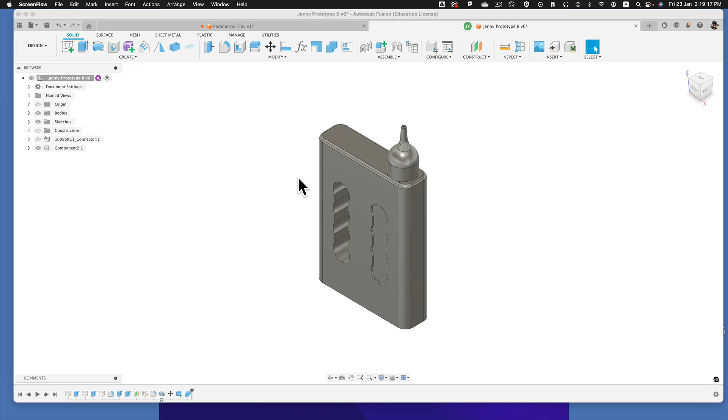Okay, in this video we're going to look at how to print two materials on the 3D printer. Specifically, when we look at this model on the screen here, it's a prototype of a drinking bottle, and the handle area here would definitely benefit from some soft material, touch points for the user.

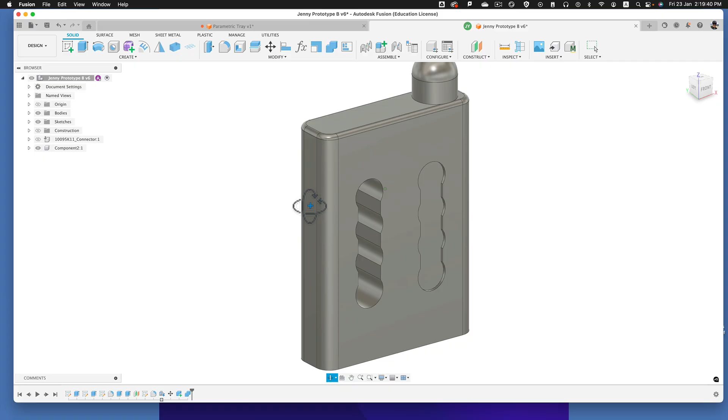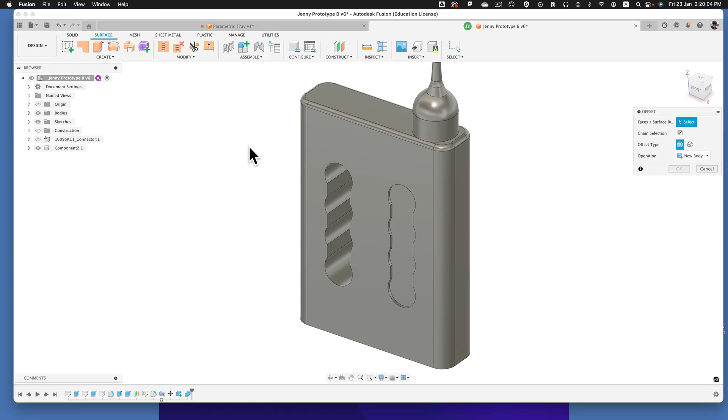At the moment it's just all the same material, and so we're going to add some material in here to help the user use it more comfortably. So let's get into it. I'm going to use the surface environment, and from the create menu I'm going to create an offset of that surface. So you can see the offset menu appears.

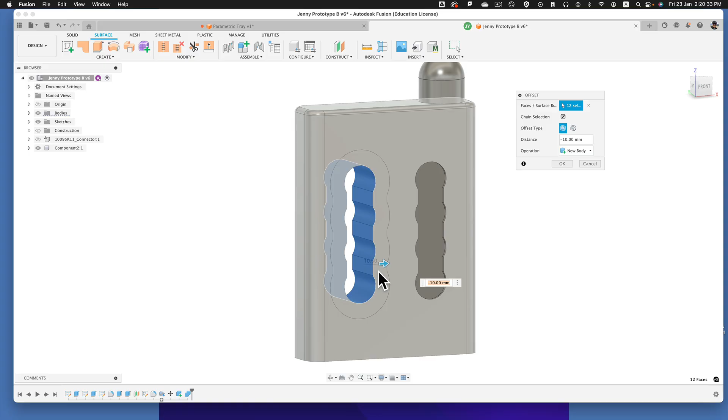I'm going to go inside here and just make sure that all of these surfaces on the inside here, these are the surfaces I want to offset and create a separate body from and print from a different material. So I'm going to maintain the dimensions that have been made here, and I'm going to make the offset out of the body. Now you can see it's defaulted to 10. It's probably a bit much, so I'll use 3 as my offset, and I'm creating a new body there.

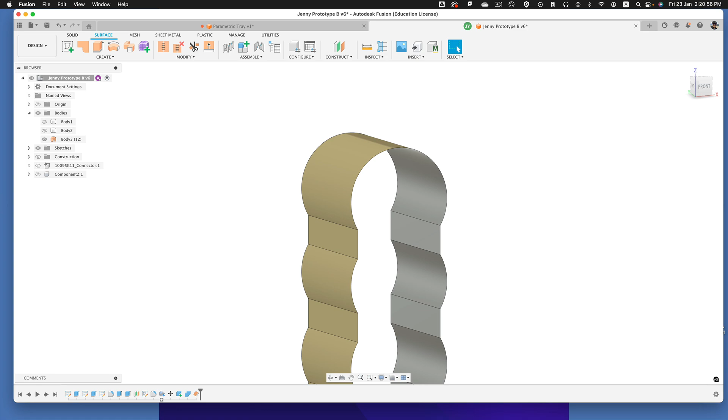I'll click OK. Just to show you what's going on here, I'm going to turn off the drink bottle itself, and here you see the new body that's created. But one thing you should note is that this is a surface. It's about as thin as a hair, and that can't be printed, so we need to thicken it up so that it's a printable 3D body.

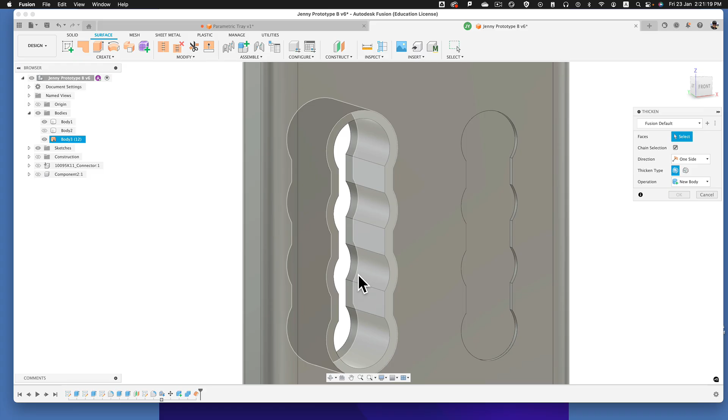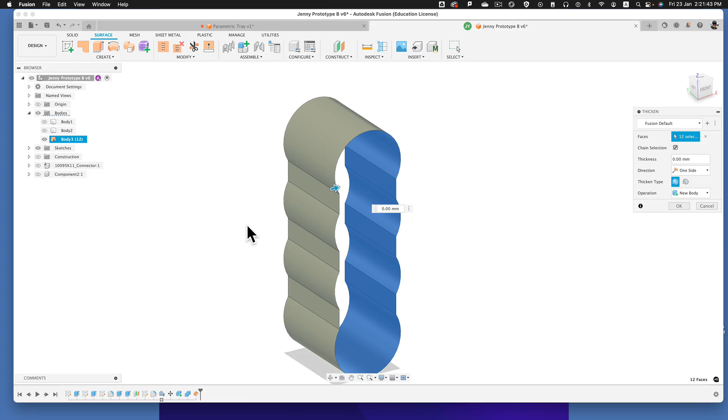That's easy to do. From the create menu we'll choose thicken, and if I turn that main body back on, I chose to go out with my offset, so I'm going to have to come back in. So I'll click on the inside surfaces of this surface here, because I want to bring them back in by the offset distance that I pushed them out. In this case it will be 3 millimeters.

It's going to create a new body. I'll click OK, and just so we can see the difference, I'll return to the solid environment. You'll see I now have a new body added to my browser. From the appearance menu, I pressed A.

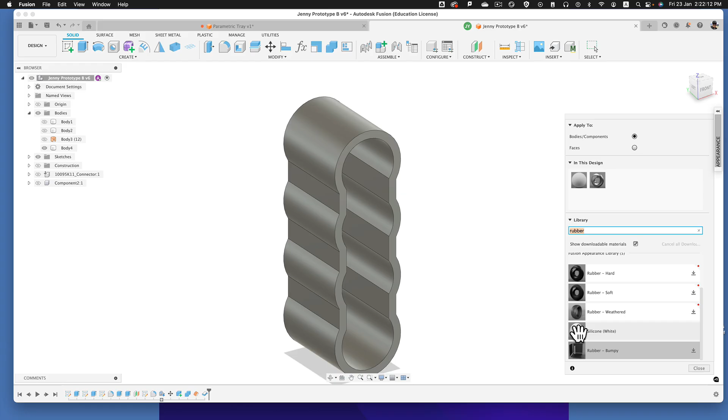I'm just going to look up rubber, even though this won't be rubber, this will be TPU, but this will just show us the effect. I'll just use a white silicone, turn the main bottle back on, and now you can see they are overlapped, and one of them is going to be printed from a TPU material and the other will be printed from perhaps a PLA. And that's it.